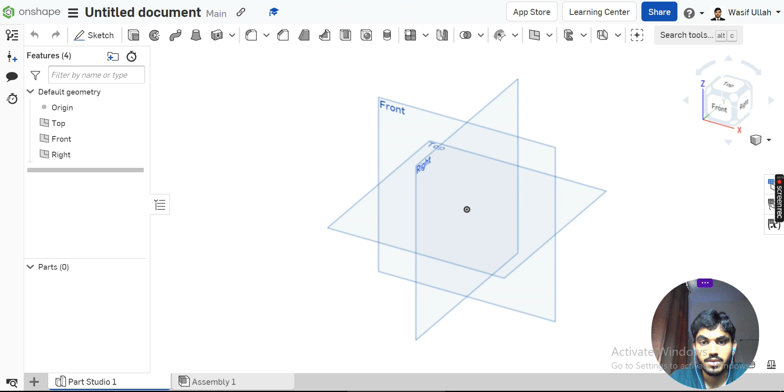Okay, so I'll go for the sketch, choose this top surface, press N on keyboard, and choose a center point rectangle like this. Go for smart dimensions. This one is 64, and this one becomes 114 plus 64.

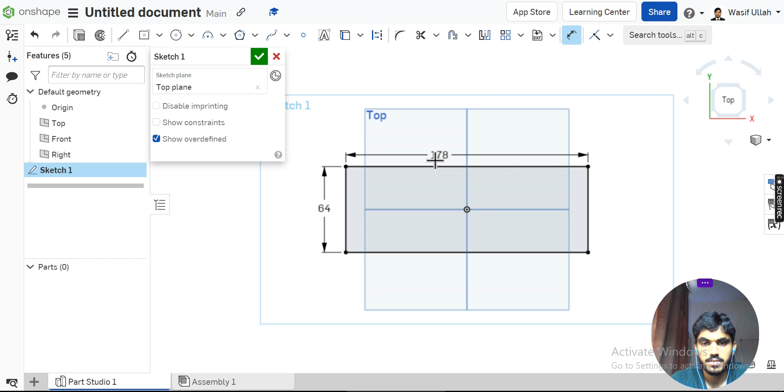That's it. Okay, once you've done this, you can see the thickness is 13. I'm gonna go for the extrude, and here I will define this thickness as 13. Okay, the next thing I can do is just to add this portion, and for that 64 is the width, and then the extrusion becomes 64 minus 19.

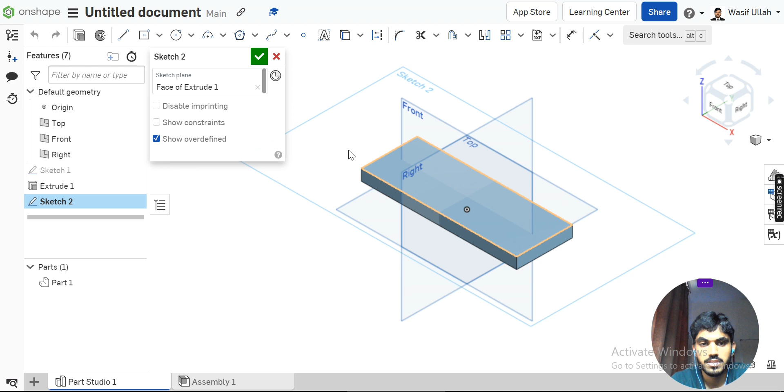Okay, so I will choose this top surface, sketch on it, and make it normal, or simply you can make a sketch. I will go for the center point rectangle. When it coincides with this line, click somewhere here, and this side is 64, and I'll go for the isometric view.

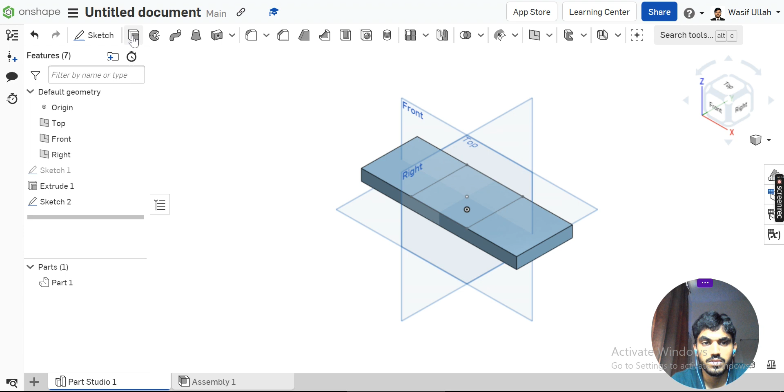Now you can extrude this one, and 64 minus 19, minus 13. Okay, alright.

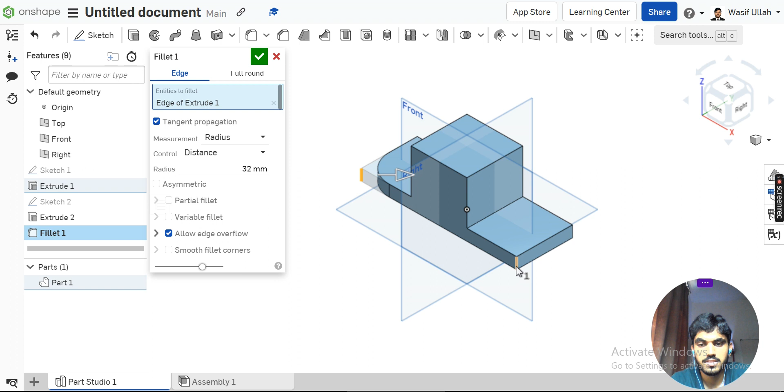Once you've done this, what you can do is just to apply some fillets, and for that I will apply the fillet, define this radius of 32, and you can just choose the edge of this object.

Okay, again I would like a hole of diameter 22. I'll go and create a sketch on this top surface, and draw a circle somewhere here. Press escape, and now apply the concentric mate with this and with this. Now go for smart dimension. This is 22, and this one is also 22.

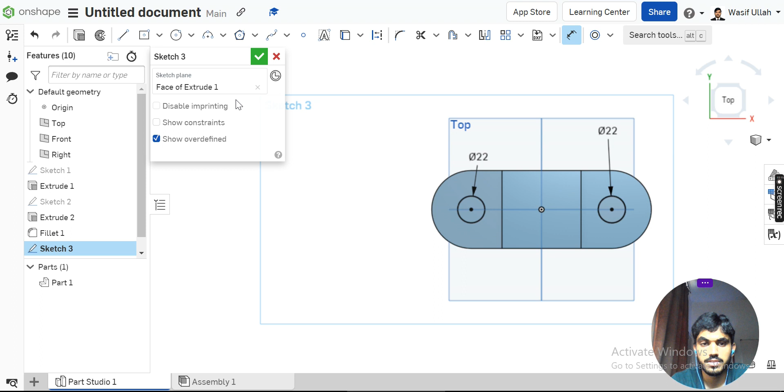I will hit OK, and now I want to remove this material. For that I will go for the extruded cut, select both of the regions, remove the material, and this time I will select through all. Okay, alright, the next portion is just to create this cutout.

For that I will just create a plane at a distance of... 64 is this one, so the whole is 64 minus 38. So let me just create a plane. I'll just create a plane and offset. You can flip the direction and define it 12.

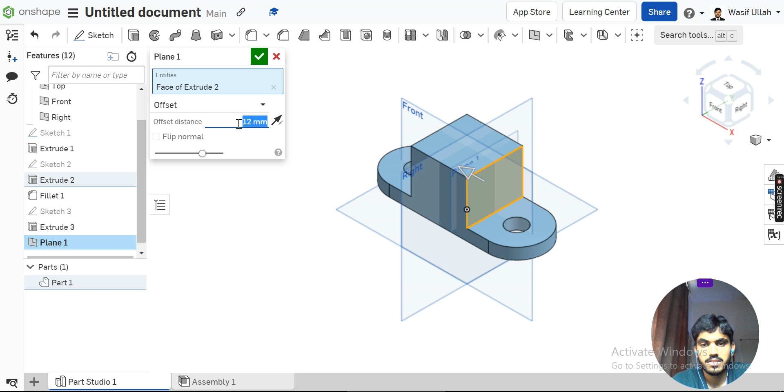Okay, and now I can choose this plane. I will sketch on it and make it normal. You can just rotate your object like this. Sorry. Yeah, this plane, and sketch on it and make it normal.

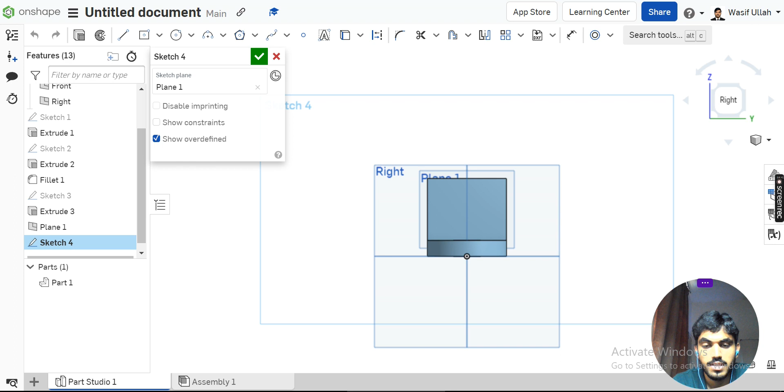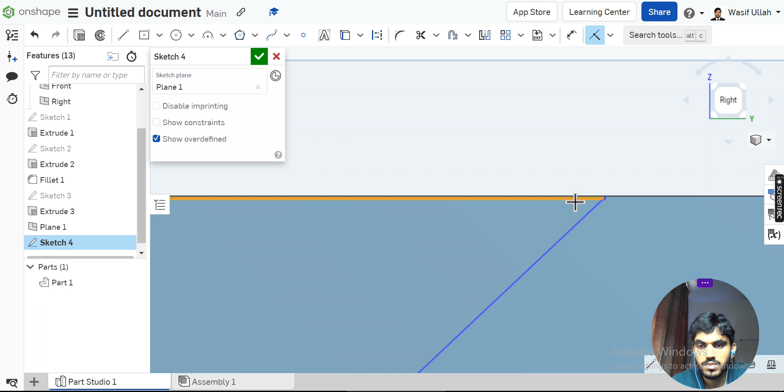Alright, next I will add this cutout. For that I will start a line starting from somewhere here, this and like this. Now what I can do, I'll go for the coincident on both of the lines, at this point.

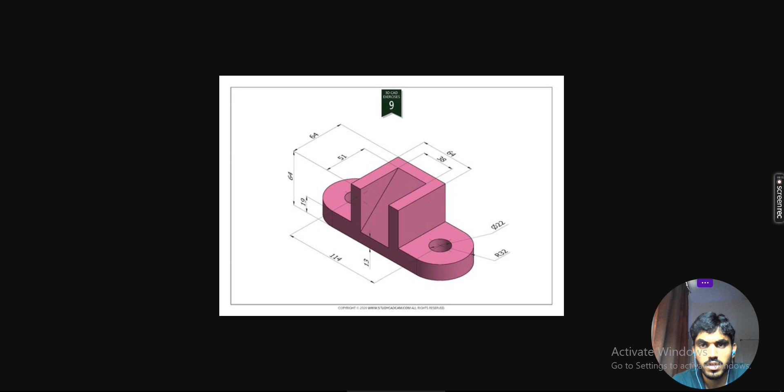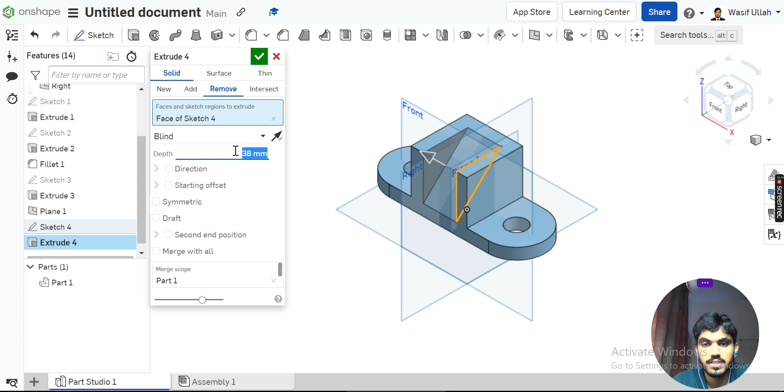That's it. And if you look here, this thickness is 51. You can directly mention this dimension, which is 51. So I'll hit OK. I'll go for the isometric view, and now you can remove the material, and this time I will give 38. Let me just define 38, and that's it.

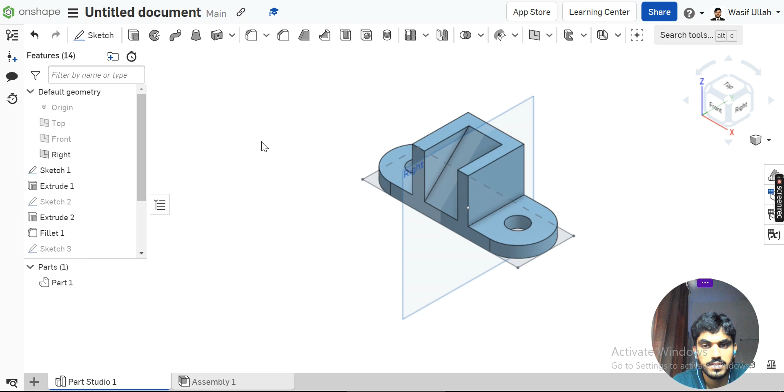Isometric. You can just hide the origin point, edges and everything. You can even hide this plane; click on the plane and hide it. Alright, so this was the object I just made, right?